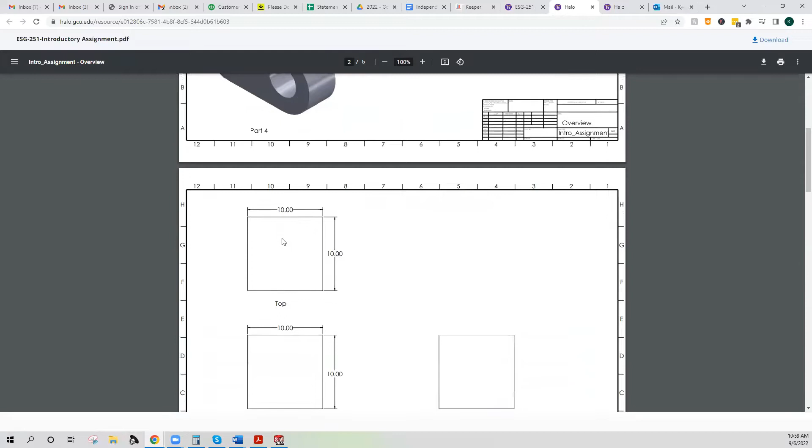So on the calendar, the very first assignment, what you're going to see is down here, a lot of the times there's going to be an attachment. So you always want to scroll down to the bottom and see if there is one. What we're going to do as one of the first homeworks from this is some basic sketches. All of this stuff is 2D that you then turn into a 3D component. So 2D components that you turn into 3D. We're going to talk about how to do that.

So you start by picking a plane that makes sense, and think of this as the plane that's actually bisecting whatever it is that you're working on. So if I were drawing something cylindrical like a coffee mug, right? It's one of my favorite example items to use. The symmetry of a coffee mug is along the length. And so I'm going to think about using either the front plane or the right plane, because those are planes that extend in Z the way that I want them to. A top plane can make sense for some different reasons, but it depends on what technique we're using. Since we're going to do extrude today, I'm going to start with a top plane.

So what we're going to do is create a circle. So there's all these different geometries that we can use, and each of them has a drop down for different variations. Each of these has a lot of different specific applications. We will use splines occasionally. We'll use circles, squares, and arcs frequently, like all the time. So what these are going to do is give us a lot of different mechanical options for how to represent an object. Sometimes that's with a circle. Sometimes that's with a center point rectangle. Sometimes that's with some other features, but I'm going to start with a simple circle here. So I want to make sure that circle is selected. And then I find a center point.

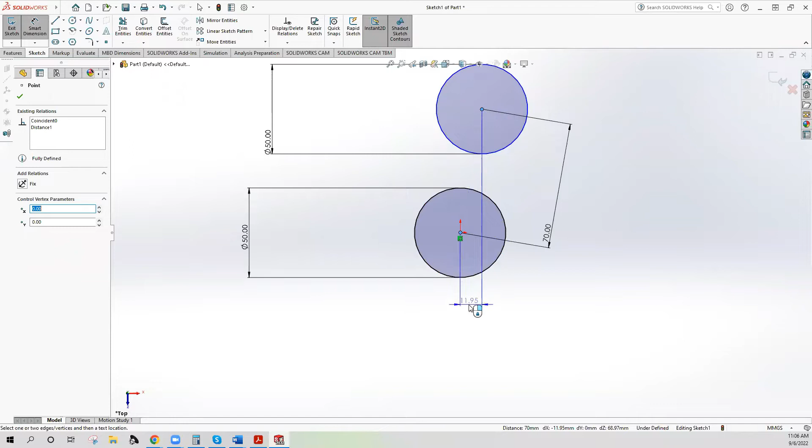You can see a few different ways that we can pull off a dimensioning line. So we're going to pull this straight down instead of at a horizontal or up at an angle, because it'll let you do a few different variations. So it's very important to understand those, and we'll get to some angular and arc dimensions and other things later.

What we do now is we can move objects around by setting them at the two different axes for distance. And now we have a fully defined sketch because it understands where the origin of this geometry is relative to the origin of the original geometry.

So what this will do is give us most of what we need.

No. Come here. You're going to be a guest star today. Come here. Up. You're going to be a guest star today.

All right. So here's what we're going to work with: we are going to work with these geometries, and we're going to do a feature. So it's a good practice for each of these features to exit the sketch, or what I'm going to call step out of the sketch. Then you're going to see the lines change color. And because these are fully defined, it's going to make life a little easier.

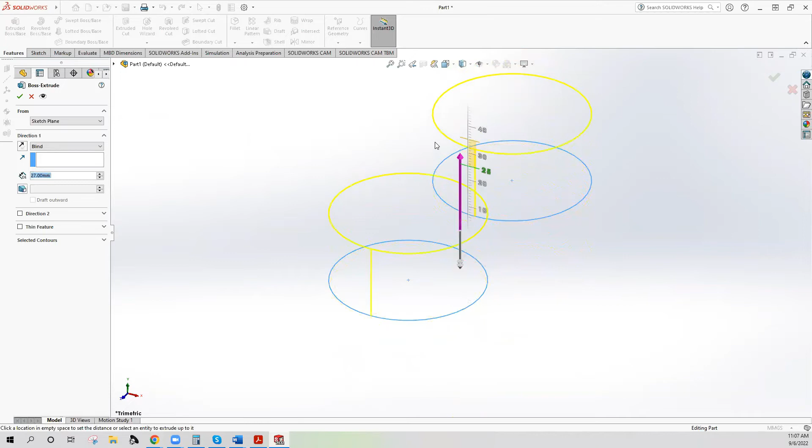So we're going to do what's called an extrude. That's one of the operations we're doing today for a bunch of different things that we're working on. You can set the geometry manually. You can drag it using this arrow when it highlights orange. You can change the direction and have it go down. So you can extrude up or down. We'll also learn how we can do extrude cuts, where we're doing cuts down through different things.

So think of SolidWorks as a way of drawing and representing how you would make material. So if I were making a simple pair of table glasses or something like that, I might increase this to 55 millimeters or something of that nature. So now I have a pair of cylinders from those original objects.

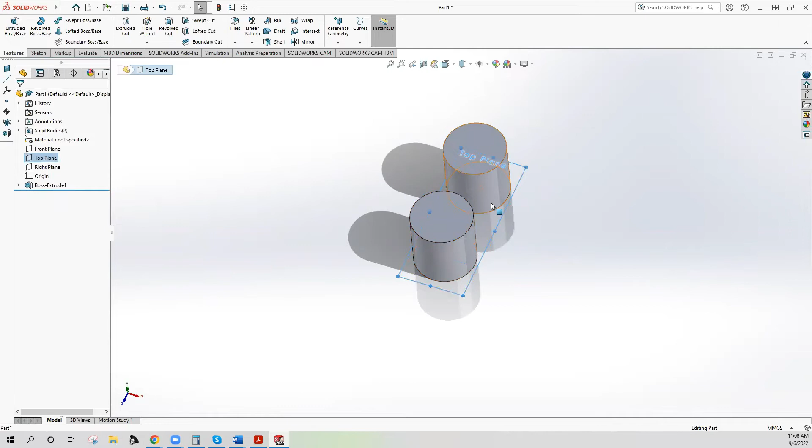So this is why I selected that top plane, because if you select any of these on the left side, this is our part tree. This is going to tell us what kind of operations we've been working on. We can see our top plane. This allows me to very easily make a couple cylinders in this orientation.

There's another couple ways that we can do that. There's a couple other features that we can do spherical shapes with, but this is kind of the basics for an extrude. I'll show another kind of quick example where we have a little bit more complex geometry.

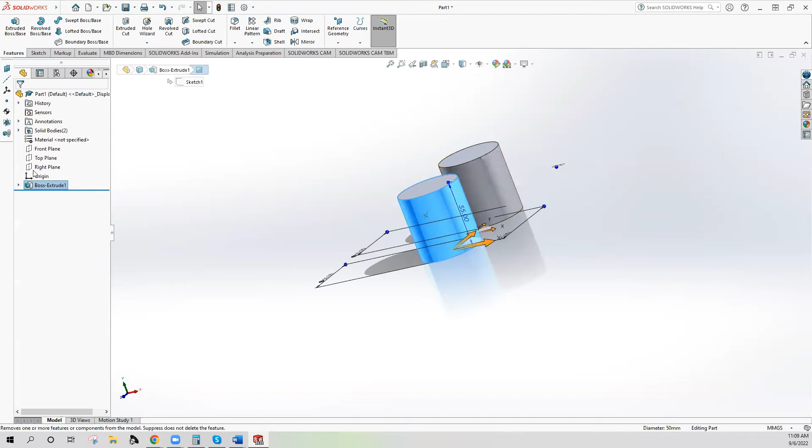So if I delete this because I don't need it, by right-clicking on whatever that feature is, we should have a delete feature. This might be one of the fun little hot fix issues that they're referring to. So normally you can execute a delete. Sometimes when you have the objects selected as a whole, it will prevent you. So it's interesting that we're having as many difficulties here as we are.

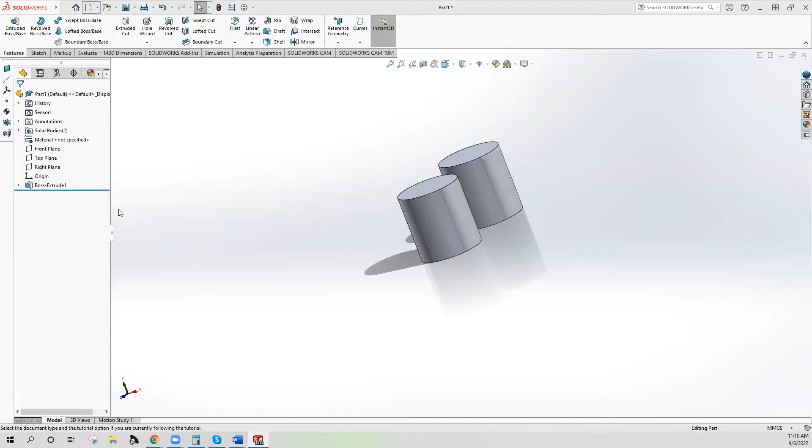So I'm going to do another rectangular shape. So this is a new sketch. This time I'll do it on the right plane just so that you can see how that's different. There's a few different types of geometries here. They have their place. Sometimes you want a center point rectangle. Much of the time you want a corner rectangle. Occasionally you need others, but not always.

If you guys haven't ordered a mouse, that's another thing that you're definitely going to need. That's not just a good idea for this class, but it's something that you're going to need.

While you're working with a trackpad, which is inferior technology for this particular class, you can come up here and you're going to make very frequent use of the view orientation button to get you to face whatever plane it was that you think you were working on. So in this case, this would be the right plane. This would be the front plane. So this is the face that we want to see, because this allows us to be looking directly at the face of what we're actually trying to work on.

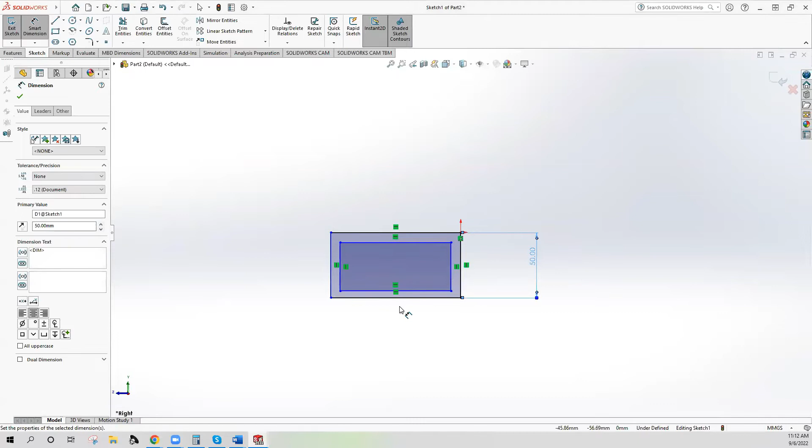So this one we'll say is 50 millimeters. This one we'll say is 75 millimeters. This one is going to be 50 millimeters. This one is going to be 35 millimeters.

Then I'm going to set a distance. There's a number of ways to do this that are pretty fancy, but what we're going to do is just teach you the simplest example first. So you move an object around, and then you can set some dimensions equal to each other. And there's some ways that we'll learn later on how to do those sorts of techniques.

But we're going to have for this about 20 millimeters as our distance. Let's do 15. That's a little bit closer. So the difference between this should be 12 and a half to get a nice even spacing. And so here, this should be about 7 and a half. So I'll let that be your homework as to why this is the way it is.

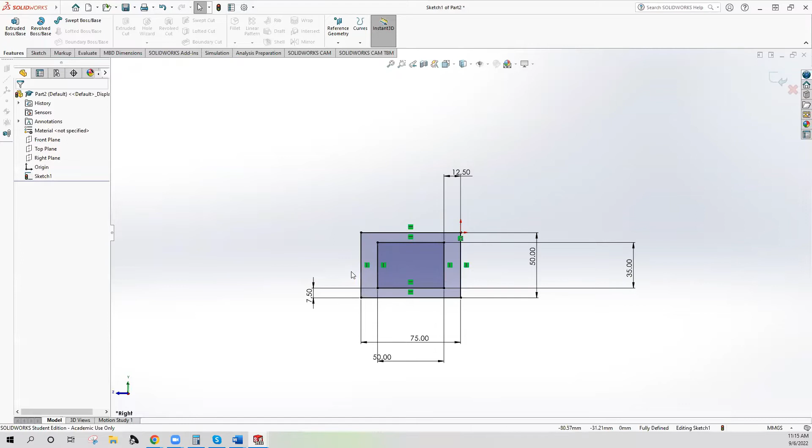The reason that it's important to set these up and make sure sketches get to be fully defined is when we go to make changes to them later, we want to make sure that all of the rest of the relations change, especially when we want to do multiple design variations in something called a design table. So that'll be a way that you guys can really get a lot out of the geometries that you're working with without having to redraw everything constantly from scratch.

So oftentimes it will default to the interior volume. You can select specific regions. So I'm going to tell you guys, pay attention often to these contours, because they're going to give you the ability to say, hey, I actually really do want this specific region, but I don't want this one. So some of the time it'll default to the entire sketch, and you'll have to clear out selections and specify, I only want this part of it, right?

So maybe we're going to make some kind of very simple rudimentary picture frame or something like that. And this I could do as 7.5 millimeters. And because I've got all of these set up, it's ready to extrude my feature. But one of the things I want to point out to you is sometimes, especially if you don't have a fully closed, fully defined sketch, this thin feature will pop up. So that's a warning sign that you may have done something incorrectly, or you may have some other difficulty going on. So you want to always deselect that thin feature.

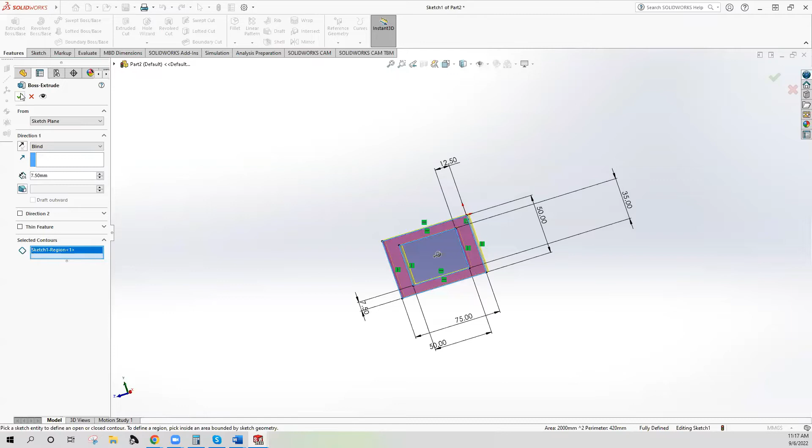So with this extruded, for those of you that have SolidWorks up and running, if you click and hold down the scroll wheel, you can change your view. That will be revolutionary once you actually get to work on more complicated parts to be able to see what's going on. Then you can always snap back to a specific view using the view tool. So a bunch of really, really important things that we're going to cover kind of all in a hurry for this first part.

All right, so in the chat, give me an idea how many of you are currently, let me get my command bar back here, how many of you currently have SolidWorks actually up and running and it's working for you? I'll get set up for one of our next drawing techniques. Okay, a couple of you are in the download process. Good. Okay, up and running smoothly is very good to see. That's always a challenge, trying to get SolidWorks to run smoothly. No matter how much RAM you have, it's always going to tell you that you don't have enough.

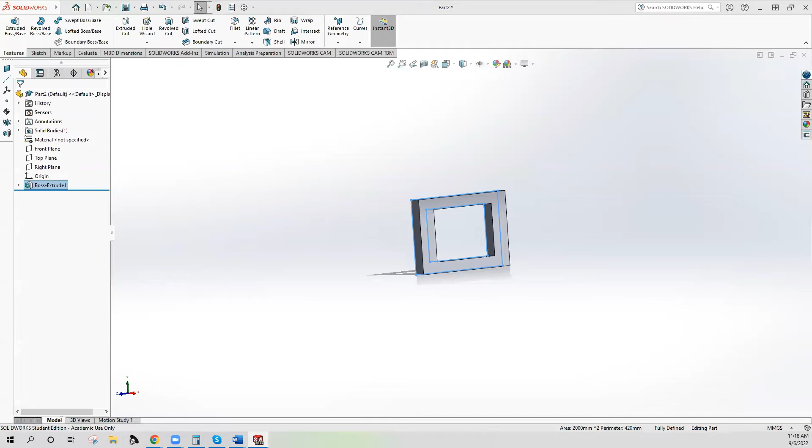Yeah, Zach, you'll want to make sure that you're getting 2022 ready, because they allow for the newer versions to open stuff from the older version, but then it'll convert it up to a new format, and that'll create all kinds of things. Yes, technical support. There will be some conversations with technical support.

The install process sometimes works smoothly for about 70% of students, and then the other 20+% suffer greatly. And then 2 or 3% made the poor life choice of running a Mac, often with an ARM processor. While cute, power efficient and all those other things, they can have issues trying to run SolidWorks because of emulation problems. So that could be what a couple of you end up facing—hopefully not too bad, hopefully we'll get them squared away. Okay, good, so that's actually a lot more of you having it installed than I expected. That's a good starting point.

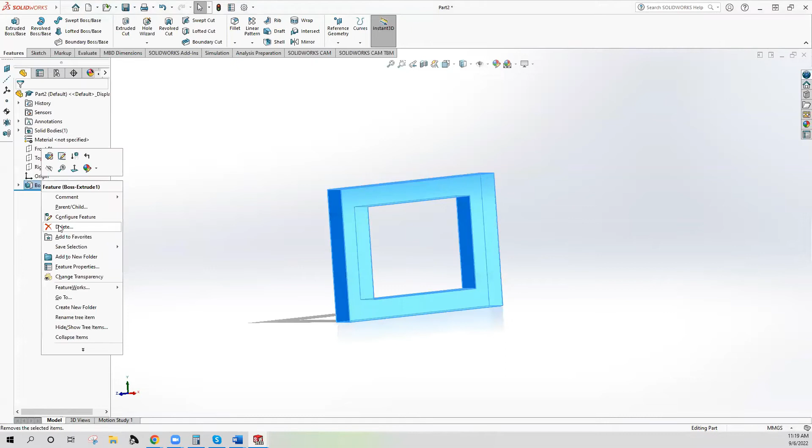All right, so we're going to go over another technique. I'm still not sure why I can't do a delete of a feature, but I can still do a rollback. Very interesting—so that's another technique you can use if you need to undo something and make a change. You can do what's called a rollback by moving that line up. Sometimes that's useful; there are a couple instances where that's something you're going to need to do.

Let's do one more thing. Let's take a look at how we would create something like a ball, because that will be very, very simple. We'll start off with a circle, since that's the base geometry for a ball. A lot of times you're going to end up with something like this where, okay, well I can't pick a plane now—well, now what do I do?

A lot of times when you're starting a sketch, this is another thing that's really critical when you have a lot of components. If you have a lot of other things already in the sketch window, even if they're rolled back like this, you have to expand the part tree up here and then make a reference. So here, I'm going to do it on the front plane just because that's fairly simple.

So I've got a circle already selected, but you'll notice my view. If the origin doesn't look like a right angle and looks something like this, you know that it doesn't have it—note that right angles don't go left. A lot of students kind of forget that, and so they draw stuff backwards and inverted, then go to put parts together and they don't fit because it's a mirror image. So remember, right angles go right. If you're dyslexic, that could be something you'll have to pay careful attention to.

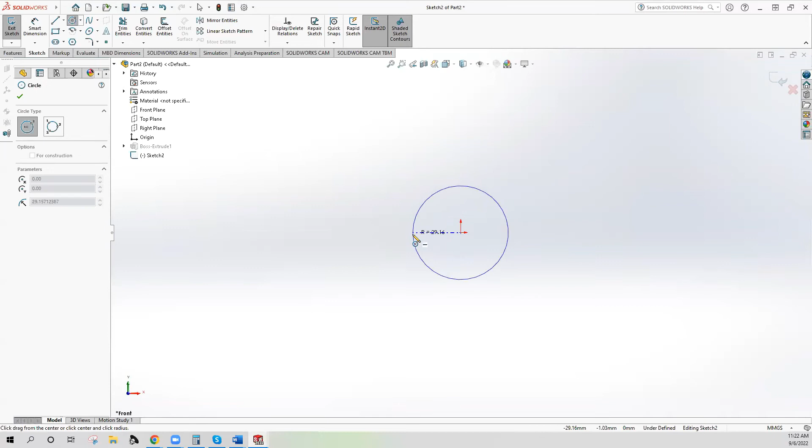But here, what we're going to do is go back to the view snap and make sure that we are square with our window of orientation. All right, so if we were to do, say, a 60mm ball—okay, so this, we have a cool technique under the features here called Revolve. They show an example of something like a donut, and also this little animation where you can make a disc out of a rectangle. So we can make a ball into a sphere, right?

But then you see here, we need some kind of an axis of revolution. Okay, well this gets us into another type of reference thing that we need in some drawings, so we can't do this yet. We're going to hit the red X and cancel, and go back into this sketch.

If we were out of the sketch and we had the light blue, what we could do is either click—if you click and hold over the name, you can rename it. You can always go to edit sketch here, or right click and edit sketch. That tends to be my habit for a range of reasons, so that I know I'm editing the specific sketch. The reason this becomes important is when you start adding lots of reference planes for some features and techniques we'll learn about later—you need to know exactly which plane and which sketch you're working on so that you don't get things mixed up. You'll see when we go to do things like the loft feature why that's so critically important.

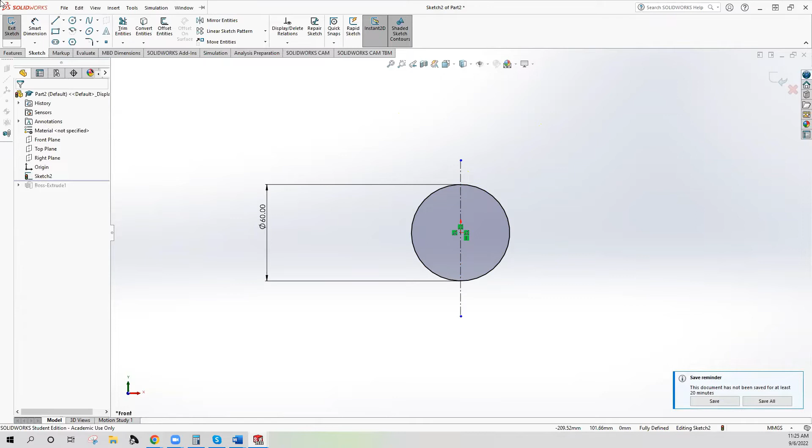Now we're going to do something cruel and use another tool, but we'll do that in a couple minutes after this quick demo. Once we're done, typically for whatever operation we're doing, we're going to hit the check mark, or hit the escape key depending on what it is we're trying to do. So I'm going to step out of this sketch by hitting exit up here, and then go back to this revolve because we now have something to revolve.

So again, notice, hey, I don't know what I'm doing. Sometimes you'll be able to click on the feature, but if you've got a lot of stuff going on in the same sketch window, I want you to get in the habit of expanding this part tree every time you see this box and finding what it is you're looking for. So here we want to manipulate sketch 2. It's going to make a couple assumptions, and line 1 is what we're going to be using. You can manually define this. In simple geometry like this, it's going to make a correct assumption.

And because it's a fully defined circle, we're going to be able to do a revolve, and this will work, even doing a blind revolve. If we only wanted it to do a certain length, we could do something like 275. All right, so this would give us just the narrow range.

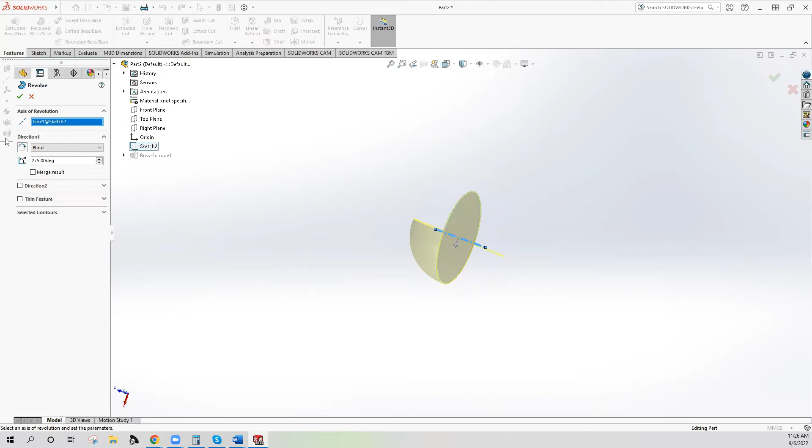You'll notice the way that it treats some of these. So let's take a look at, for instance, just let's do just 35 degrees. So 35 degrees, very different. So you can see where it starts from this plane.

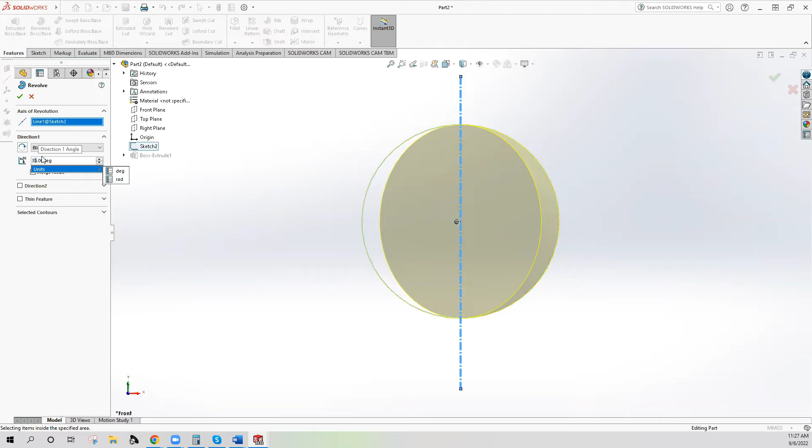So again, our origin relative to that reference plane, this is the back, and so this is the front plane. So if we're looking at the front plane, we see what our sketch looks like. This is that original circle that we started with. So as we go back up to 360 degrees, it's going to start from that, and it's going to rotate. If you're looking on from the top, it'll rotate clockwise. That is going to get confusing later on when we have more complicated geometries, but for now, we'll go ahead and leave it.

So even still, what we're going to see is, wait a minute, the sketch is open and self-intersecting, or it intersects the center line. So the reason we don't do a circle if we're going to do something like a revolve is because what this is going to try and do is create along this axis, because it's revolving the whole shape around itself, especially at 360 degrees. Even if we did 180, this would work, or it should. But because of the way this circle is going to be defined, as it tries to rotate around that shape, that axis is going to intersect itself multiple times, and it doesn't understand what to do with that geometry. So any ideas how to fix that?

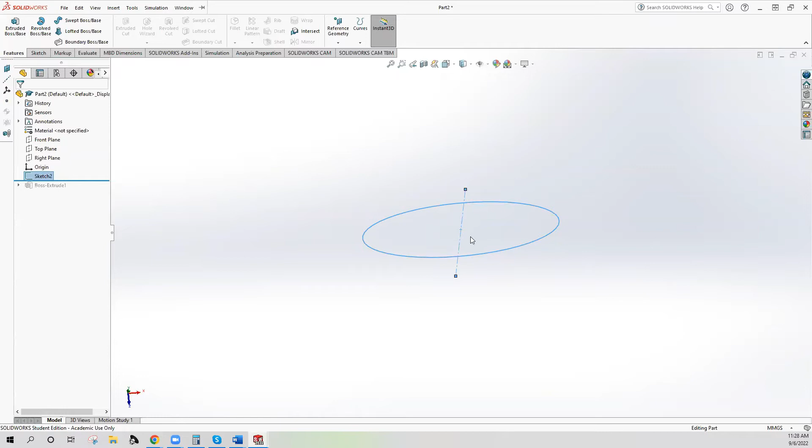I'm going to have to go back and edit this sketch. So we're gonna have to go back and edit the sketch. Okay, I don't see any suggestions.

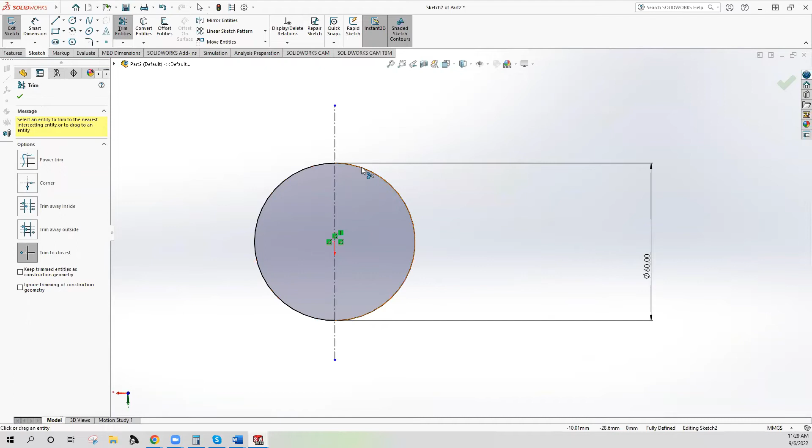So what we're gonna do is use a trim feature, and I'm gonna default to trim to closest. There are a lot of reasons why that's the best option, but trim to closest—I think it's going to default to power trim, but you're going to want to use trim to closest—because what I can do is take away half of that circle. But now it's no longer a shaded region, right? So since it's no longer a shaded region, I have to take one more step and enclose it with a line.

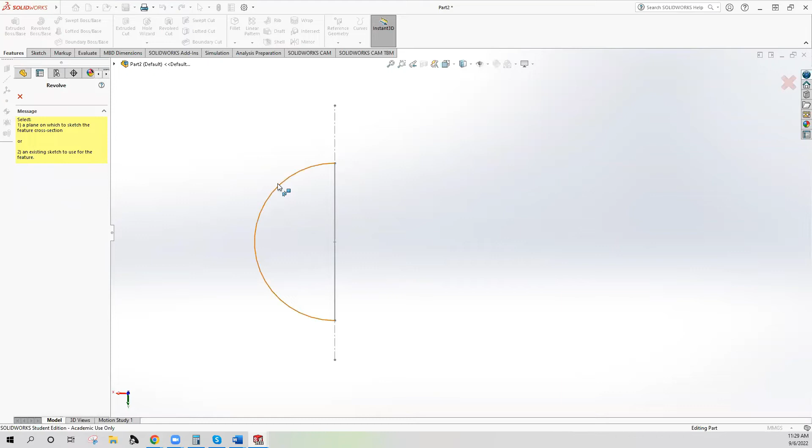So the arc and this line now form a fully defined semicircle. This is something that I can use with that technique to actually revolve. This is one that you guys are going to make a little bit more interesting use of soon.

So we want to revolve around this center line. We could do 360 degrees. This is a blind region, just to show you for good practice. This is how you would select the specific contour so that it was this enclosed region. And then we hit OK, and now we have our sphere.

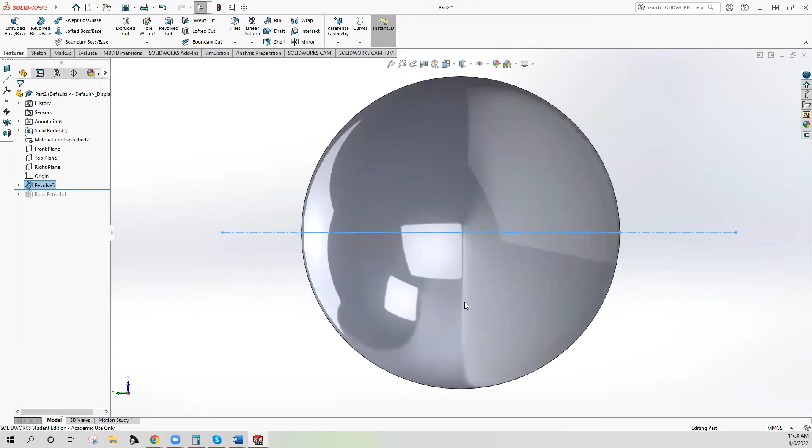But because of the way that this is created, we can see that our view is completely upside down based on what it should be. So if we look on from the side, we look on from the front. This is actually the back plane, and this is actually the front plane. So if we look on from the front, now we can see our correct view orientation.

Again, I wanted to show you guys an example of where the view and the orientation matter when we're doing more complicated parts. You guys thought we were working on the left side there, but we were actually working on the right side, because we were looking at it from the opposite side. So it's one of the only ways I can think to demo how you are going to start changing your thinking from 2D to 3D in how all of this works.

So that covers a few of the basic processes. Those of you that have SolidWorks up and operational, I'm going to set up a couple breakout rooms for you guys to start trying to practice a couple of these things. I'm going to jump around to the different rooms and see what some of the questions are as you guys are trying to start this process.

So it looks like probably a good percentage of you, at least half or more, are in pretty good shape. A few of you are still downloading, I'm sure, because GCU's internet is renowned to be some of the fastest in the land. That's the good news.

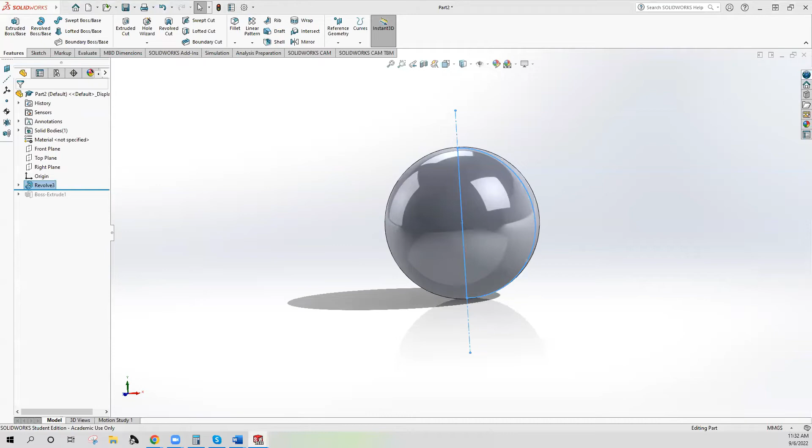And actually, that feature may not be enabled for this. Yeah, I think they've moved that feature out actually. You might have to stop recording because it might not allow you to do it while you're recording. Yeah, normally I think they've moved some of those features in the software now.

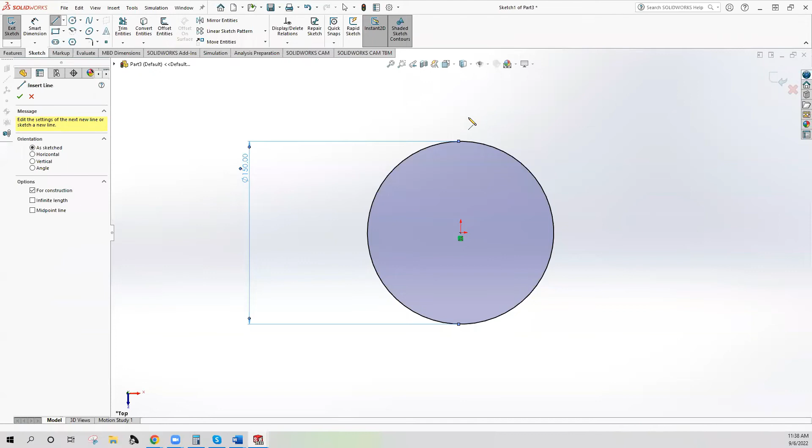Because I'm going to reuse this sketch using some of the same techniques that I used elsewhere, I'm going to add a center line. I'm going to do that all the way through the center here. This is going to give me a reference point that I'm going to need. I'm also going to add this line down the center, a solid line, because this is going to give me all of the features that I need to do everything that I need to do for the next 2 steps.

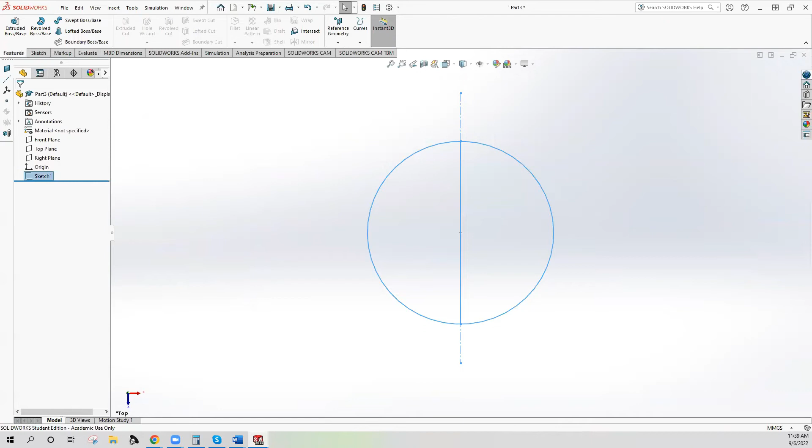One of the things that I find helpful because of how often I use them is we're going to learn really quick about a reference geometry. I'm going to go ahead and extrude from this sketch. I'm going to tell it I actually want both this region and this region. Because of those dimensions, I want it to be something like, let's do something like 900. It's probably a little aggressive. Let's do 500. So let's do something like this.

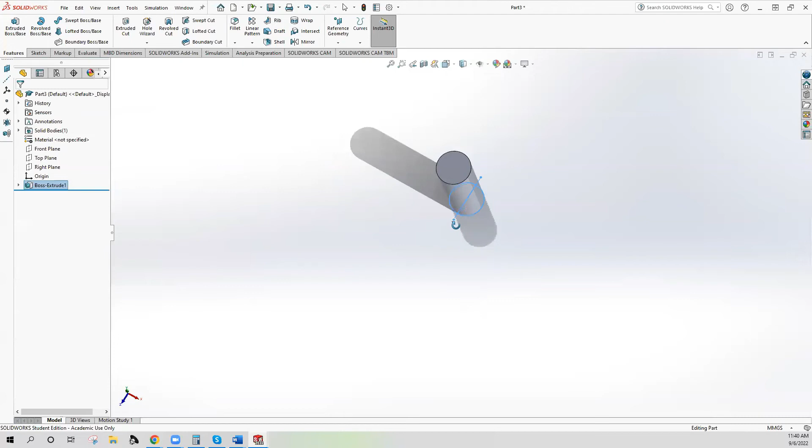So now we have the first part. The question is, how do we now do something here? There's a couple different ways. You could start by adding a new sketch. And so I'll show you what that would look like, and then I'll kind of go back a couple steps and show you what I would do.

You can click that face, or you can click that edge or some other reference point once you've done an extrude. But the problem with this is, and I'll show you kind of what that problem is, if I then create, even starting with a center line, one of the things that's easy to get into the habit of doing is sketching on an off angle like this. It's going to throw you off, and it's a bad habit to get into. So you want to reset your view.

Just trust me, I'm a doctor.

So I'm going to use an arc. I'm going to use a 3-point arc specifically, or a center point arc. It's different from a 3-point. I use 3-point and center point often. So this gives me just this arc that I'm interested in. I'm trying to show as many different variations of technique as possible so that you guys can kind of adapt

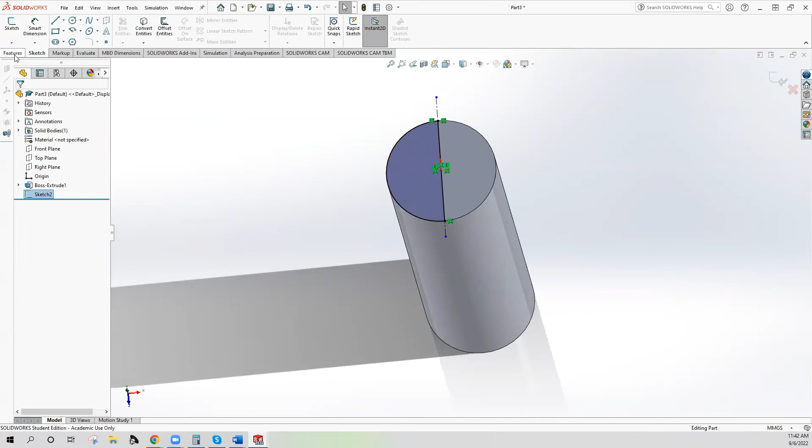and adopt different techniques. So because this is referencing an extrusion from a fully defined sketch, this arc itself is already fully defined. So if I step out of the line properties there, I have a fully defined semicircle at the top, right? And this works great. I can then step out. I can do my revolve feature, and I only need 180 degrees here. And then we're done, right?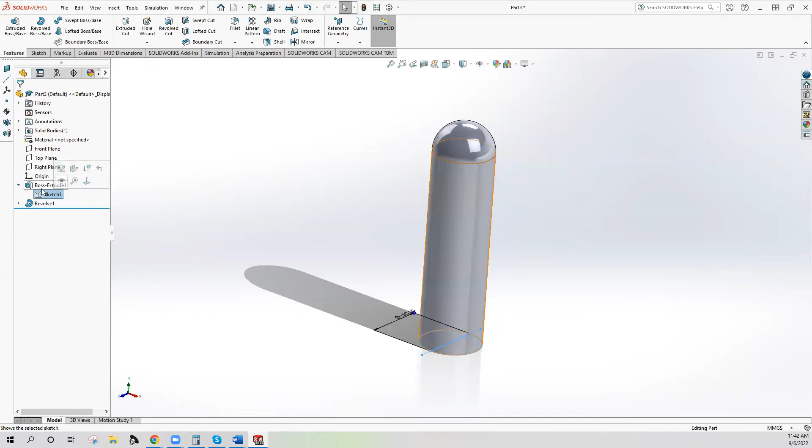But then I go back and read the assignment prompt, and actually this isn't supposed to be this tall. That looks nothing like what the actual prompt does. That's way too tall. So I had to fix it. And now this is where the problem can originate, depending on how complicated and detailed your sketch is. So instead of editing the sketch itself, because the sketch is fine, I have to right click and then edit the feature. So it's another thing you're going to do very often.

So actually this needed to be 450 millimeters. So this time, because I'm referencing the top of that geometry, it was able to follow. Depending on what it is that you're doing, you can create a problem. So I'll show you an example of what that looks like using this next technique.

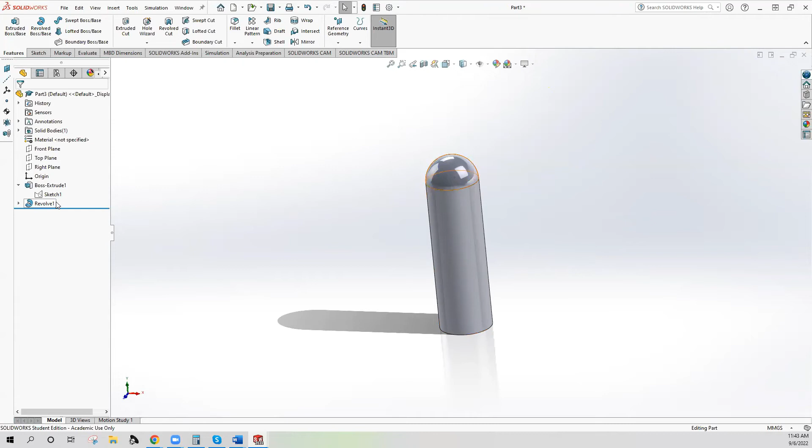So I'm actually going to delete the Revolve, assuming it'll actually let me delete a feature. No, it will not. Interesting. Yeah, that is a bug with a capital B. So I'm hoping that's fixed in the patch, because I need to go back and reinstall that. Yeah, you normally can do that. So I'm going to do this a different way now.

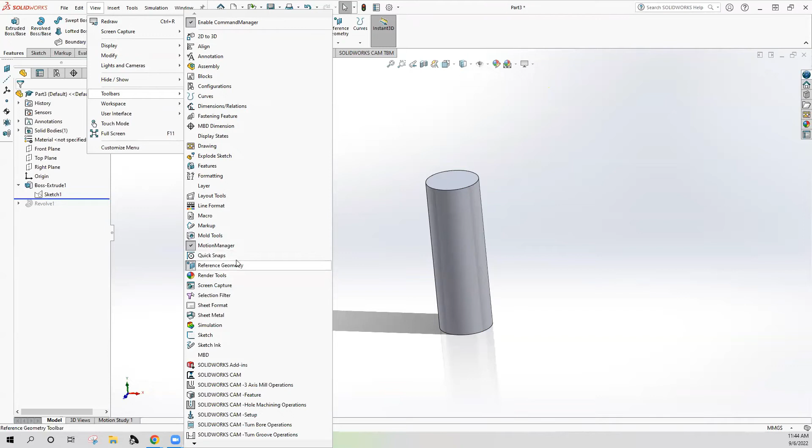So one of the toolbars that I make visible all the time is going to be under View and Toolbars. This is also where you can come back and find the command manager. If for some reason this top ribbon that's called the command manager goes away, this is where you can find that again, because a couple of you will almost certainly have that happen, and it will send you into a full-blown panic. Reference geometry is one that I recommend having. I stick mine off to the left side just because that tends to work really well with the way that I think about the program.

The way to do that manually is to insert a reference geometry and then plane. I don't want to go through those 8 steps every single time, especially for complex geometries. So in this case, it's very simple. I'm going to reference that face, and this is what's going to create the different dimensioning that I'm talking about, and it'll create an error. So I'm trying to intentionally create an error so you guys know what it looks like, so that when it comes up, it will be obvious what you need to be doing.

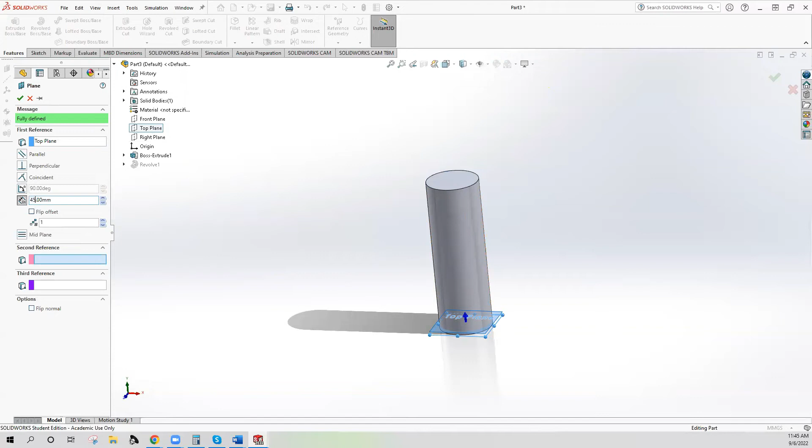So if this was, let's say we'll set this back up at the 500 millimeter distance right here. This is what's called a reference plane, and we're going to get to use these very, very often. So this is going to be something that's going to benefit you really starting in the next couple of weeks as we start getting further into 3D sketches. But there's a lot of utility for these that we'll get into. So I'm going to start by fixing this. I'm going to set this back to the 500 that we had.

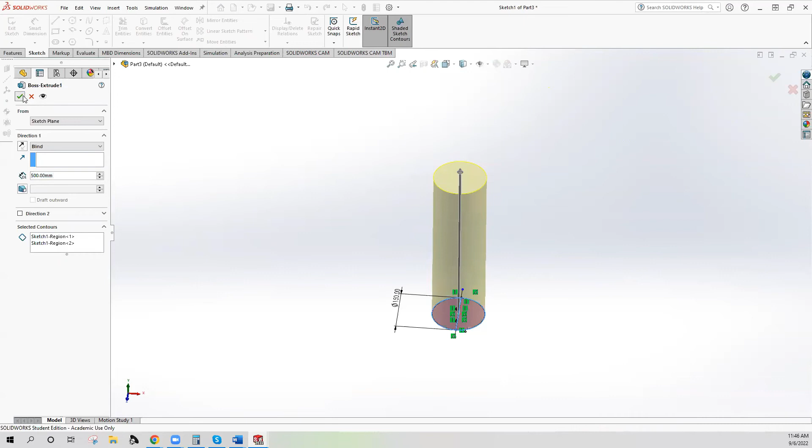And now on that plane, I'm going to add a sketch. So when you select a specific plane, this is what I was talking about, you really want to pay attention to which one you're selecting. Because if you just do a sketch, it may or may not default to being on that plane. But this will allow me to separate the features of this sketch from this cylinder. There are circumstances where you do want to be able to do that.

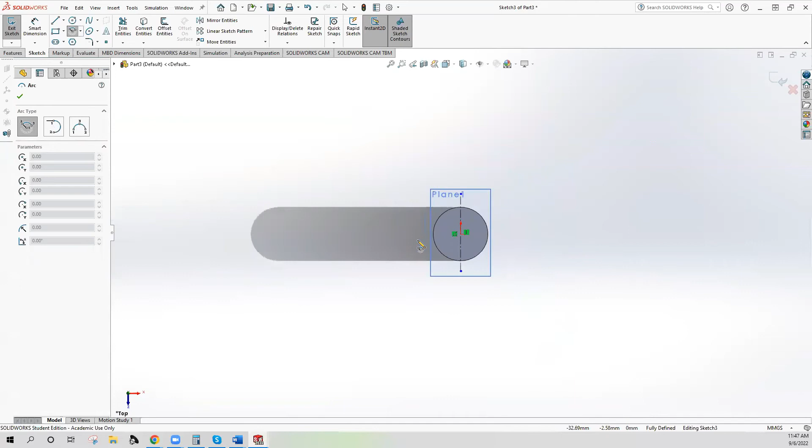It's not always exactly the same reasoning, but I'm going to go ahead and use my center line again, deselect the tool with escape, and then I'm going to come back here to a center point arc, because that just makes the most sense. Again, realign things, because the center point of that line is not the same as the center point of the origin. And if you're trying to do things quickly, you're just going to whip it like this.

So a number of you are going to do this on sketches. So I'm going to go ahead and leave the error so that you know what it looks like and where it comes from. So if you're trying to be quick and lazy and you go, all right, I'm going to connect this. Almost every semester, at least one student turns in something very much like this.

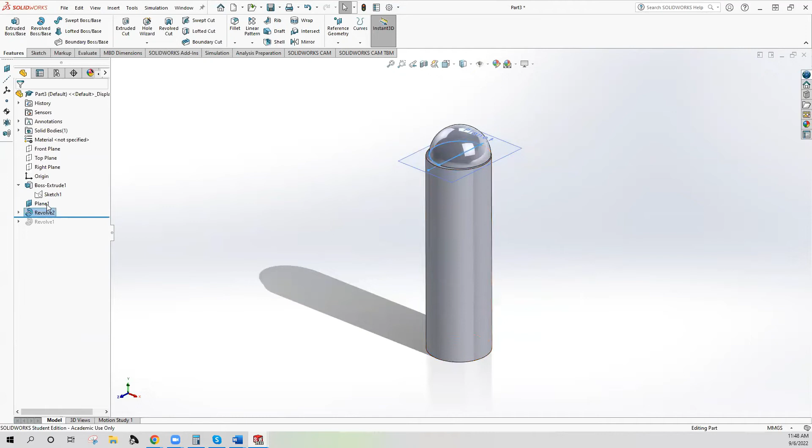So, all right, now I'm going to go back over to features and I'm going to revolve because I just want to get done with my homework for the week. 360. All right. There we go. So now I've got not quite close, but not quite. Now I go back, do the same thing, figure out, oh, wait, this actually isn't the right aspect ratio. This actually needs to be 450.

Now we have a problem, right? So is there a way we can fix this? Or do we just have to start over? What do you guys think? Let me see a vote in the chat. How many think we can fix this? Good. Positive attitude is good.

Yep, totally fixable. The reason I like reference planes is because I can come back and any of these features that I'm working on, I can come back and edit and say, actually, I really needed this instead of the top plane. I really needed this to either reference this face with a 0 offset or reference this top plane and then have the new dimension entered as 450.

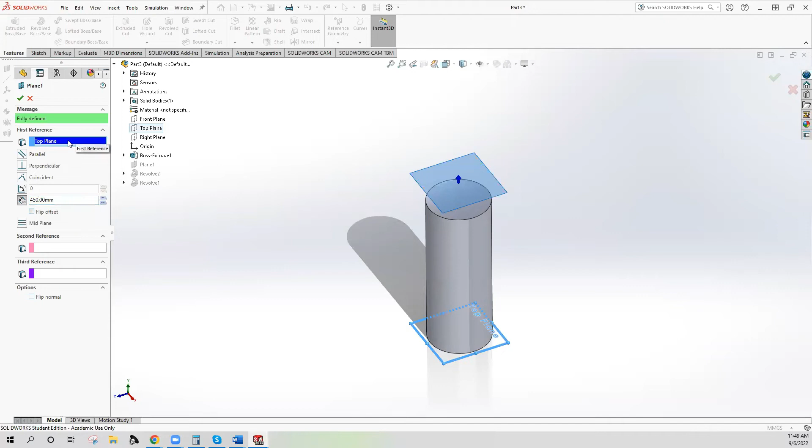Much of the time, if instead you associate it with the face instead and do a 0 offset, that will get you what you want and the geometries will move together most of the time, including the reference planes. So those tend to be pretty important. So this gives you a few ideas on how to fix some of this.

The other thing is we want to know, how about this top part since we messed that up? What do you guys think? Can we fix that or do we need to start over with a new arc? Let me know in the chat. Is it easier to start over or do you think we can fix it? Okay. So we've got a few mixed votes. A lot of folks very sure that we have to restart because it's ruined.

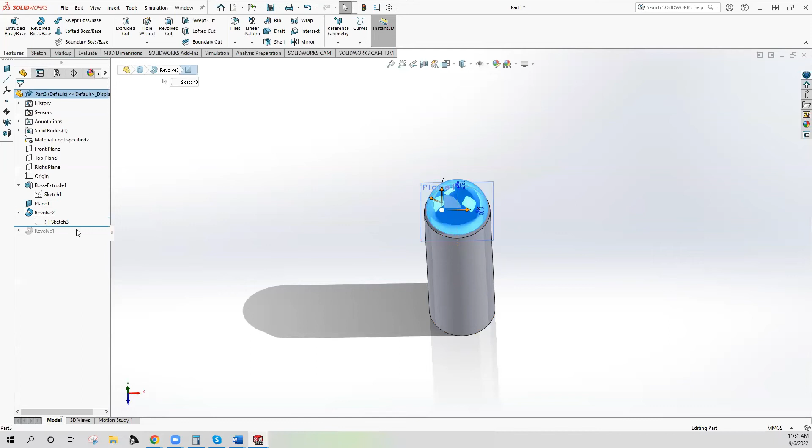Can't go back. Okay. So what we can do is we can expand whatever that feature is and look at the base sketch that created it. There's a reason it's good to have some different sketches for different types of features that you're executing. We can go back and edit that base sketch. So here, instead, what we can do is we can actually cheat and use Smart Dimension to fix it.

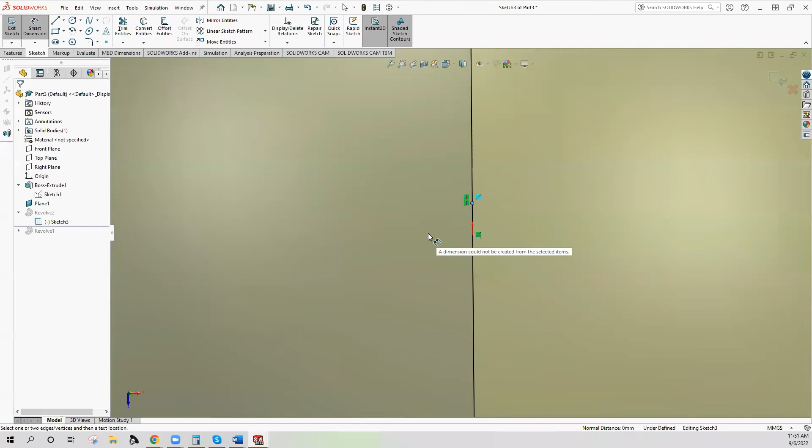So what I'm going to do is I'm going to grab that center point and say the distance between that and the origin, midpoint 1 and the origin. It's not wanting to let me grab this. So let me see if I can highlight it a little differently here. You can also do it here.

If I select, so if I selected the center line, set up the Smart Dimension, you can sometimes force its hand by manually expanding the part tree. If there's geometry in the way and it's not allowing you to make a selection, here again, the reason it's confused, this is actually a really good example.

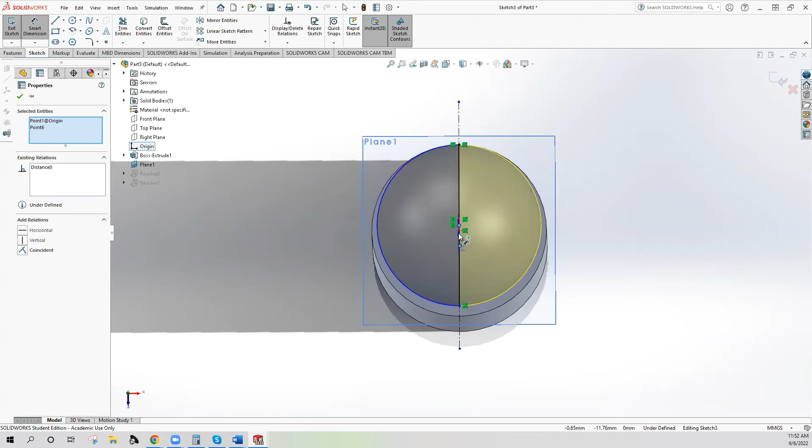Because I didn't do a reset, the actual origin is here, even though it looks like my origin should be here. So this is another example where the view orientation is important. So now I can actually pick the origin. But if I'm struggling, I can always expand the part tree and manually reference the origin as my second dimension.

And this I want to set as 0. So that will relocate my geometry to the center. And here it actually fixed the geometry to do the one thing that I needed it to. When you get to more complicated geometries with more intersections, more tie lines, more intersecting geometries, that won't always work as cleanly, but it's a starting point to correct where that feature is located.

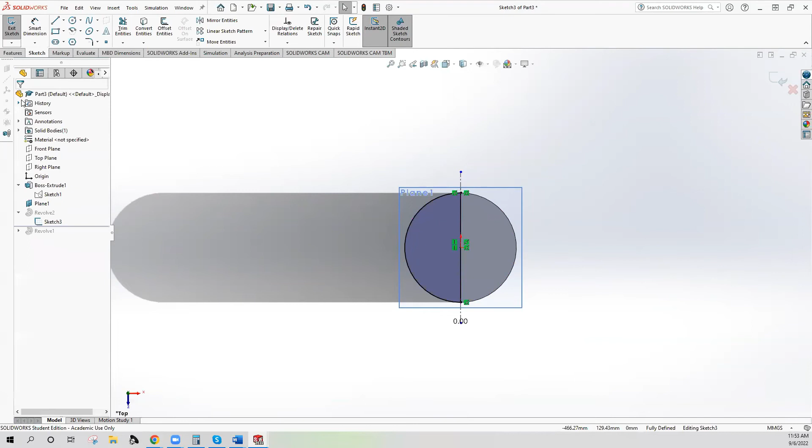So now, if I rotate this and step out of the sketch, you can watch it rebuild correctly. So there we were able to fix the geometry without having to do really extensive surgery. And one smart dimension is a whole lot faster than going back and starting over, right? So these are all kinds of the dozens of little nuggets that I'm trying to plant early in the semester so that you guys can start working to be time efficient in your sketches.

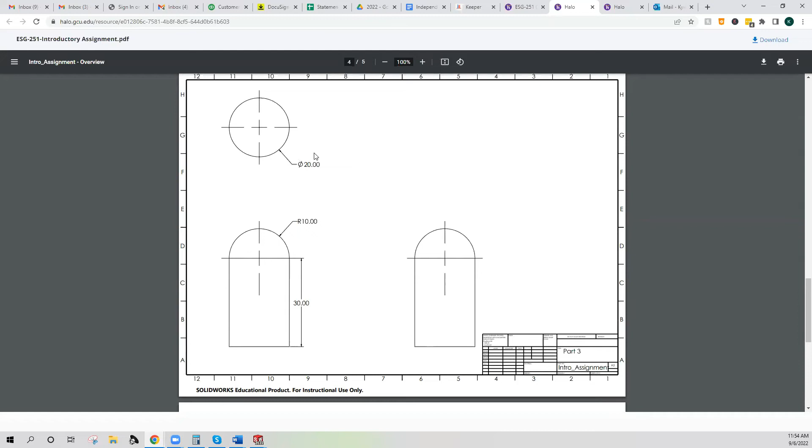Because that's one of the main things that I want out of the semester for you guys, is making sure that you're efficient, that you're fast, that you understand when I throw at you any kind of a drawing that has dimensions on it, especially when they're far more complicated than these, that you know how to deal with each and every one of them. Because there's a couple different things that we need to know, even early in the semester, like R standing for radius, the circle with the slash through it standing for the diameter or the distance across the circle.

There's different heights. There's reference measurements if it's a broken line and all of those sorts of things. So we'll get into more detail about these as the semester goes along. So this gives us at least a good range to start with for some of these early techniques. And a lot of the times, as far as the format of the class, we're going to start off by covering some of these techniques. We've already covered a number of the really early ones.

But we're going to cover the use of a technique. We're going to apply it to a couple different parts and geometries. Then we're going to turn around and have you guys practice and drill. Because you're only going to learn so much by going back and watching the technique that I'm doing. The mastery of this class comes from you guys actually doing the practice, doing the repetition. So that's one of the main things that we want to spend a lot of time doing this semester.

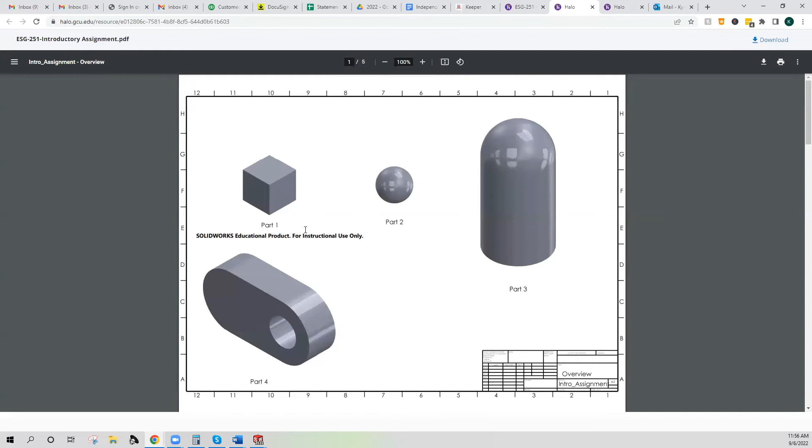All right. So that covers, I think, the major techniques for this first part. There's a couple other things that you guys are going to need to access. So let's go ahead and go over that as well. Let's get an update on your downloads. Are a couple of you still stuck on that process? I'm hoping a few more of you are able to follow along now. That's why I wanted you to start downloading the instant you got access to the welcome announcement, to give you the best chance of getting the most done. So I'll keep an eye out for that while I set this up.

So there's a couple different things that we'll use later in the semester, but one of the ones that I want you guys to be in the habit of is there are a number of files and models and things like that. But there's also a series of tutorials, and there's a few different things over here that you can access. There's a couple resources. There's like a SolidWorks manual, some other components. There's appearance stuff that we'll learn about a little bit later. But this is really kind of the hard way to get to things.

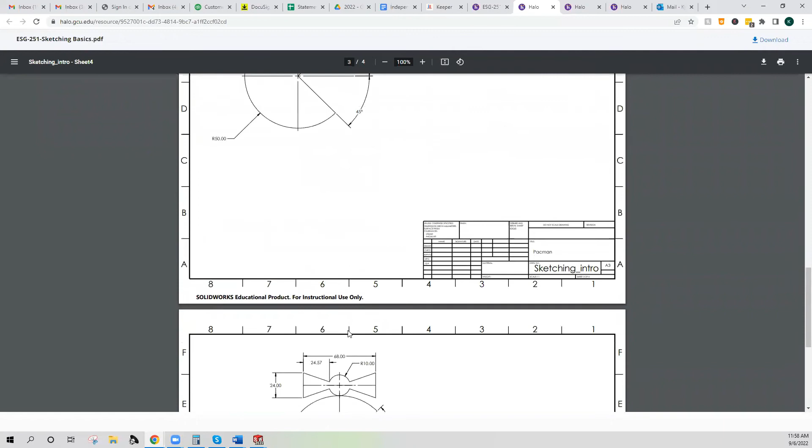So instead, we're going to go back to the home tab, because a couple of you are going to start looking for some of these assignments. In particular, you're going to start looking for anything that has a tutorial on it. So even like this sketching basics assignment, you have a few dimensions that you're going to be working with. So we're getting a little bit more complicated, some more references and things. So we're going to advance the technique next week of how to really do a lot with the smart dimensions.

But all of these tutorials are going to really help as you guys get this installed, to get you functional in the software. So I'll show you where to find them because these don't have a document attached. And we'll talk also about some of the mechanics of how to submit an assignment. That'll be fairly straightforward, but it's something that we want to keep in mind. So let's do this. So we go back to the home tab, and then up here on their list of options, there's Learn.

So the step-by-step tutorials, this is what we're looking for. And it's going to open up this other window. So this is what we're going to see. And all of those tutorials, many of them are going to be under the basic techniques. So this is the introduction to SolidWorks one. So this is one of the first ones.

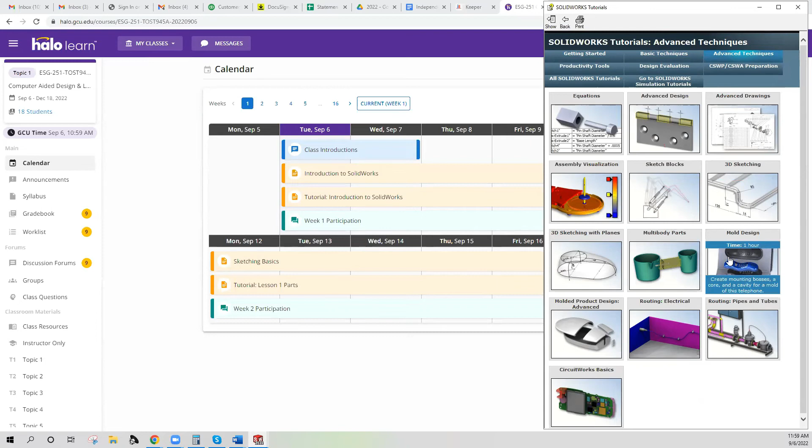You're also going to do parts, which is here. So this is kind of the fundamentals, but most of them are going to show up here under basic techniques, or at least most of the rest of them. We'll do some, I think, of the advanced techniques. We're not necessarily getting into mold design and some of those other things at this point.

I don't think we do a lot with the productivity, but there are some things that we do with simulation. I think a lot of that's now moved into individual classes. So I think there may still be one that we're doing there. And then there's some CSWA prep type processes. So giving you a more complicated geometry with more features, and it'll walk you through how to do each of these. So a bunch of these are actually baked into the assignments.

So I'll go ahead and terrify all of you guys with this one, the French curve. So this is what we're trying to build you up to, because if I can get you to survive the shock of opening a drawing like this and actually understanding what this means, which you guys will, then anything that they put in front of you in order to create for the CSWA exam, these are the kinds of things that are going to prep you the best to be able to take that exam

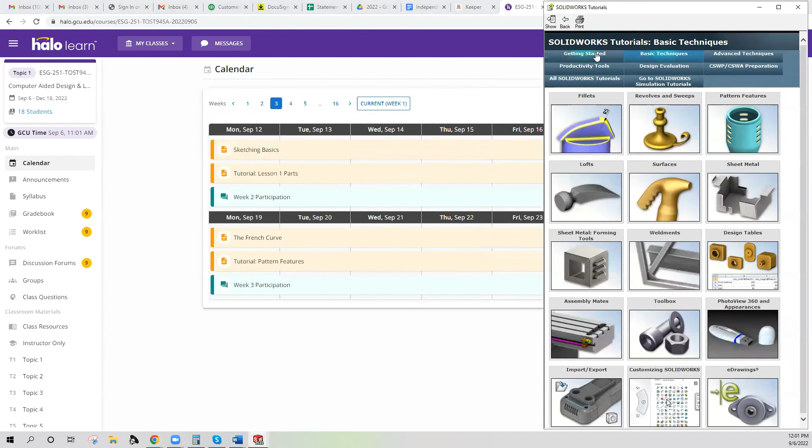with confidence. So this is why we're paying attention to all these little nitpicky details that seem like they're not very fun. It's so that we can start to get to do really fancy things later on down the road. But all of these, the pattern features, the parts, all of that is here. Mostly under either the basic techniques or the CSWA prep. So I think half or 3/4 of them are CSWA prep.

So we'll take a look at the intro and what this does. Let me make sure that it's actually going to show the geometry. So this may be a couple of the other things. So we don't actually need any of our other geometry there. You use navigation buttons going forward and backward. They don't really have them clearly labeled. But what you can do is when you click these, it will actually show you in the software again.

For whatever particular reason, we're having some challenges. I'll get that patch installed because it's doing a bunch of very unusual things. But what this will do is it'll highlight and show you where in the actual software these things are. So a couple features that you've already seen, and it'll walk you through how to use smart dimensions, how to create a couple of these processes.

Some of the time, there'll be a couple questions that'll come up, especially here where you're trying to do a distance between them, an offset distance. So that's one of the features that I was working with. You can use the offset entities, and it'll show you where that is. So it'll kind of introduce you to a lot of the features that allow you to get some interesting parts

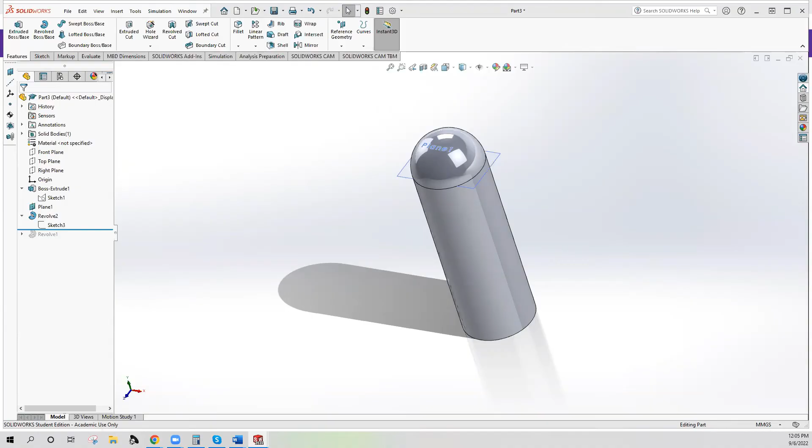So we just talked a little bit about the extrude cut being very similar to the extrude, similar kind of features. And sometimes you need a blind cut for a certain depth. Sometimes you need a through all cut. If you have multiple different geometries involved, you might need a through all both, which means through all both directions, essentially infinitely. But a lot of times you'll be okay with blind or through all.

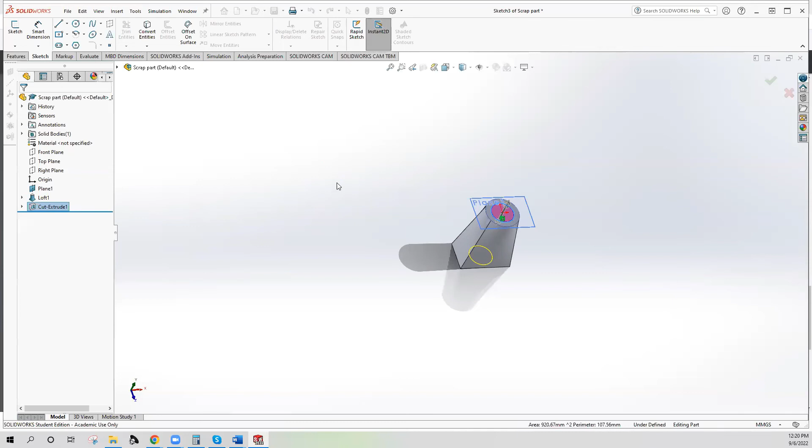You can draft inward, or you can draft outward, depending on what type of operation you're trying to do. You can do a second direction cut. Most of the time I don't recommend that, but you want to make sure that you are very carefully selecting which specific contours you want to be doing the extrude cut with. Another example of using that through cut for something like this that maybe has an unusual shape.

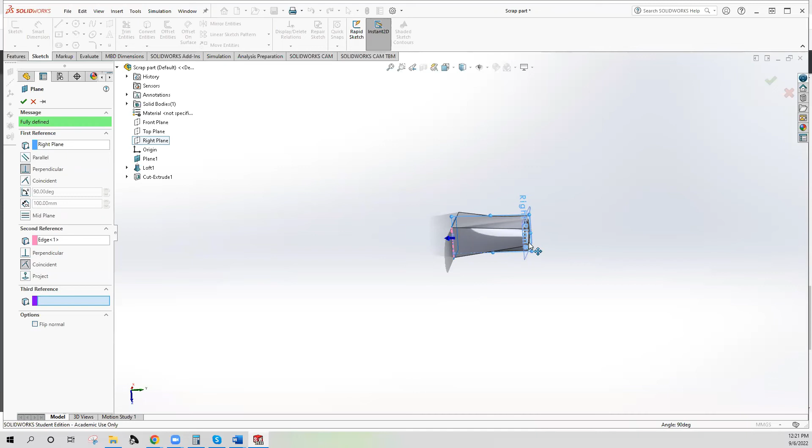There's a couple more steps that you need for reference geometry. So this is a useful thing to see for a reference plane. What you'll need is, again, to expand the part tree and start with something like a bisecting plane, which in this case is the right plane. And then you can use as a second reference something like an edge this way, and instead of perpendicular, sometimes you want it to be coincident.

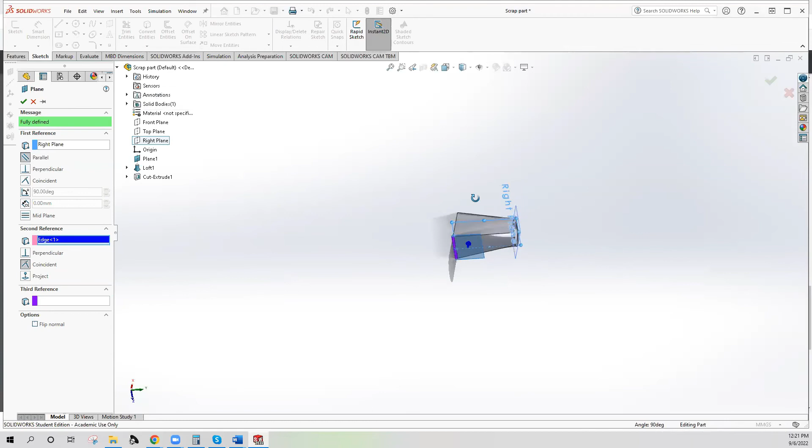But you can also, depending on what you're looking for, have it be a specified distance away. So if you pre-select what you want it to be, in this case, a distance of, if we set that to 0, that would set it to a distance of 0. So that would be a reference plane on the right plane. Now, with that 0 offset, if we were to select this edge, the distance doesn't work for us anymore. So we have to reset this to being parallel to that plane. Now that frees up our geometry to be able to be attached to the edge of whatever this feature is.

And we're going to be able to do some more complicated stuff more quickly here. Now we can change our view orientation to make sure that we're looking squarely at the part. We'll do another quick example of a cut extrude. I'll do a polygon so that you guys can see what that looks like as well. Before I do that, I'm going to add a center line, and it's going to look for what plane we're doing this sketch on. So I'm going to expand the part tree and tell it I need to be sketching on plane 2 so that it doesn't get confused on what's going on.

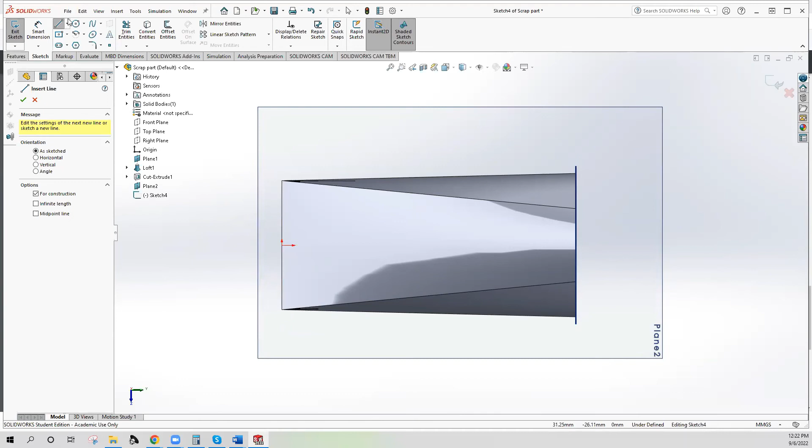So that center line is still selected. I'm going to use this as a reference because our polygons have a center point. So I'm going to do one here. And I'm going to come back in with the trim. And I don't need most of the rest of this. I'm going to do a fairly simple type of pattern.

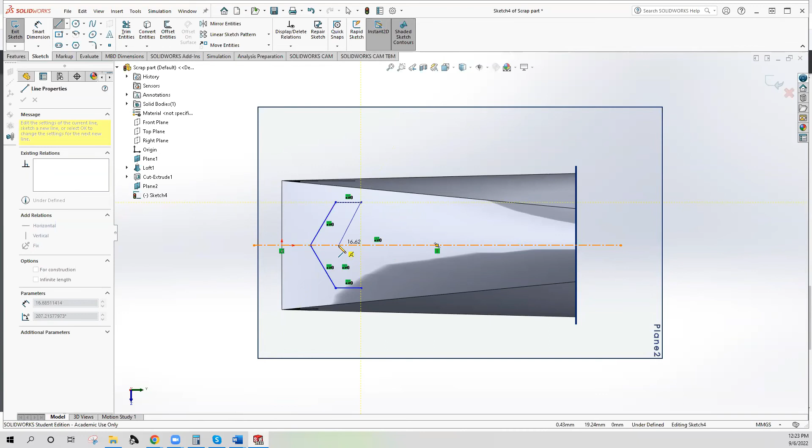So I'm going to come back in with lines. Here I can use that yellow highlight change to see the additional yellow dotted line, which means this line is parallel to this line. I'm going to do the same thing here, and I'll see this is parallel too. Then the circle inside the circle means those points are concentric.

Some of the same things you'll see in the tutorial are this linear sketch pattern. So what we can do is select this and do it along the X, Y, or Z axis. The X axis isn't particularly helpful for us here, so we're going to say 0 in the X axis. What we're interested in is this one, looking at our values here. That's the Y axis.

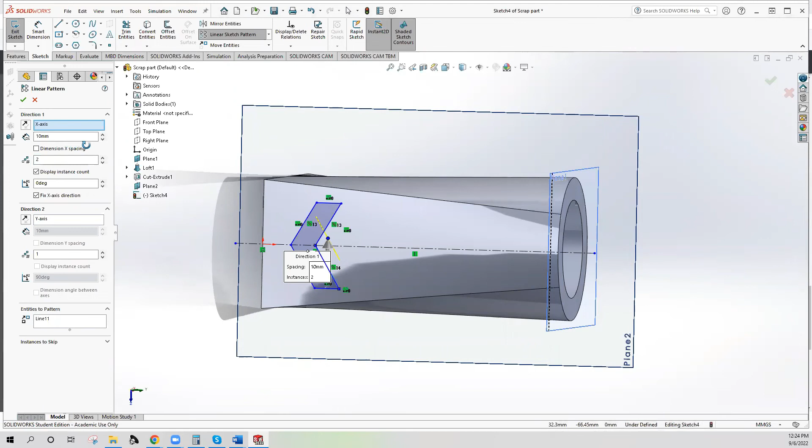So I'm going to go back into the linear sketch pattern. This one, we only need 1. The Y, we actually want to do 3, and 10 millimeters is fine. Then we want to select the entities to pattern. What we're going to do is select this whole region, and we're going to separate this.

Okay, looks like Tyler's going to be back.

So we're going to separate this by a distance of, let's see what 100 millimeters looks like. That's way too far, so let's do 20 millimeters, something like that.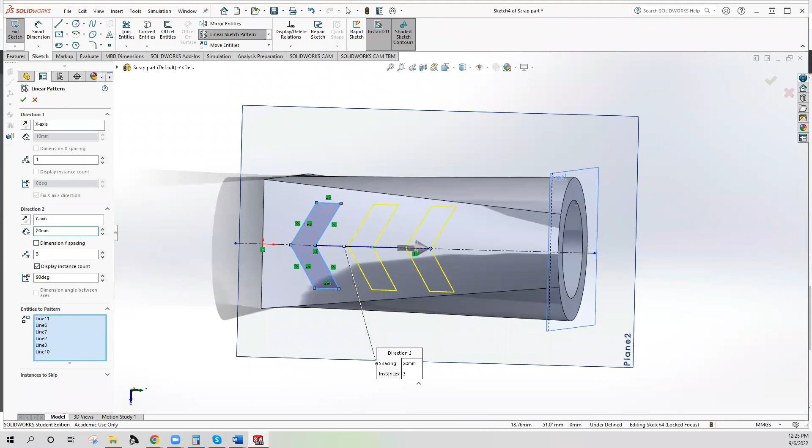All right, so here we have our randomly chosen shape. Now we can do an extrude cut using these, and this will be a good example to show you how to do another instance of a through all.

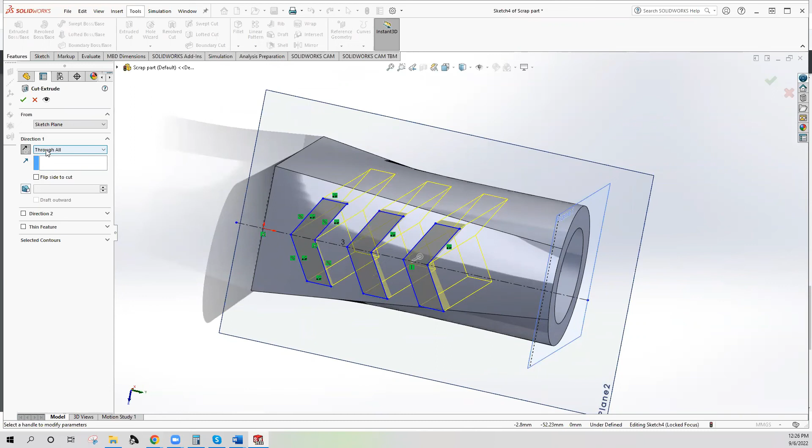I'm going to go to features while I have that sketch still selected, since that's the one I want to do this operation with. So for this feature, right now it's going to try to do a cut in this direction. What I'm going to do is either hit flip the side to cut, or change the direction manually, which makes the most sense. By doing select through all from this sketch plane, I can now see all the way through the part I've got going on, and we can see what we have as far as geometry.

So it allows us to have a lot of really interesting kinds of features and characteristics in the stuff we're doing. We'll learn later in the tutorials about how to do lofting and some fancy shapes like this, but you guys will at least be able to play around with some of these techniques and start getting very far into how to create these drawings very quickly.

So I'm kind of going over 2 to 3 weeks of techniques at a 30,000 foot overview. That's why it's going to feel really, really fast and aggressive.

But that's a good way to begin in order to make sure you guys have a very high pass rate at the CSWA, because that's going to be my goal. I want to make sure there's no question as to whether or not this particular class format can work, in order to get you guys to the goal, which is that CSWA exam.

Okay, so we've been able to use that particular feature. I'm going to pause here and then check in to see where further questions are coming up.

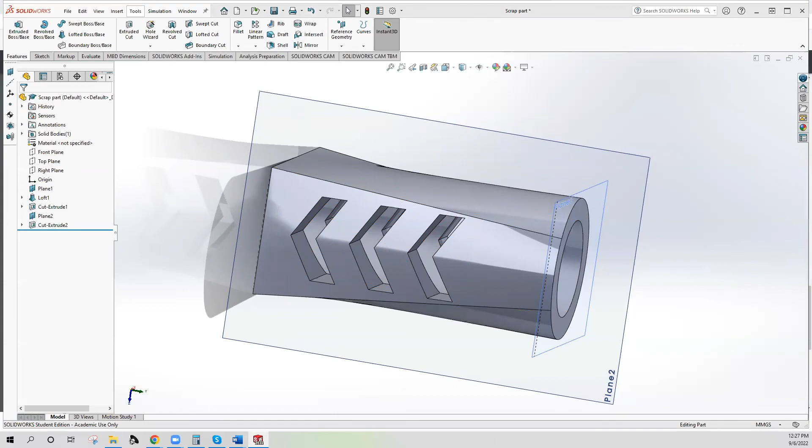All right, so I'll include this part as well. What we want to focus on, as far as the mechanics of assignment turn-in, there's a few things I want to see from you guys. One of the first big things is making sure that your part tree is expanded here, so that I can see what techniques you guys are using as you go to create things.

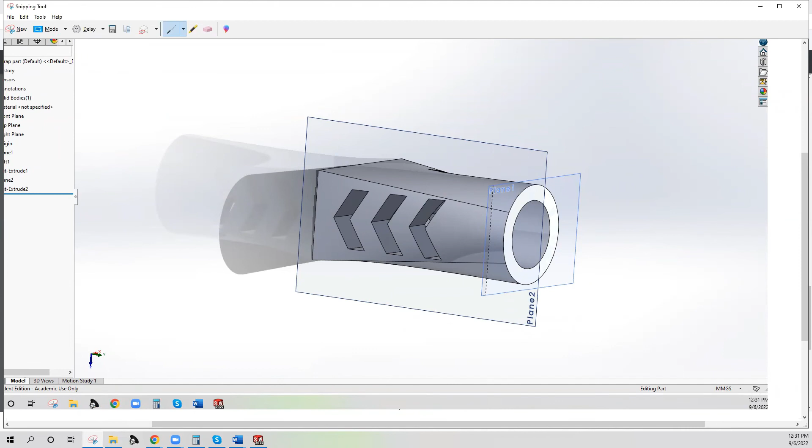But I'm going to take a screenshot like this so that I capture my full part tree, and then make sure I'm capturing, or trying to capture, what time it is. It's always interesting to see what odd hours of the morning, Sunday morning, or really more accurately Sunday night, Monday morning, students are turning stuff in.

That's private entertainment for a lot of the faculty members a lot of the times. What we want to do is be able to highlight what's been done. This way I get to see what's happening here in all of these, and you don't have to actually outline any of them. I just want to make sure you're actually using these techniques properly and understand how to apply them. Sometimes for certain things, you'll be able to select a portion of the part and bring up dimensions.

It's not always going to bring up clean dimensions for every single thing you're working on. It's probably easier in some of the other example parts we had, but you're going to be trying to get it to show some of the key dimensions if you're able to. So here, this is 100 millimeters, and you can only get there by selecting part of the parts themselves.

You're going to take some screenshots with a couple different views showing what it is that you've got, what dimensions you can get it to show.

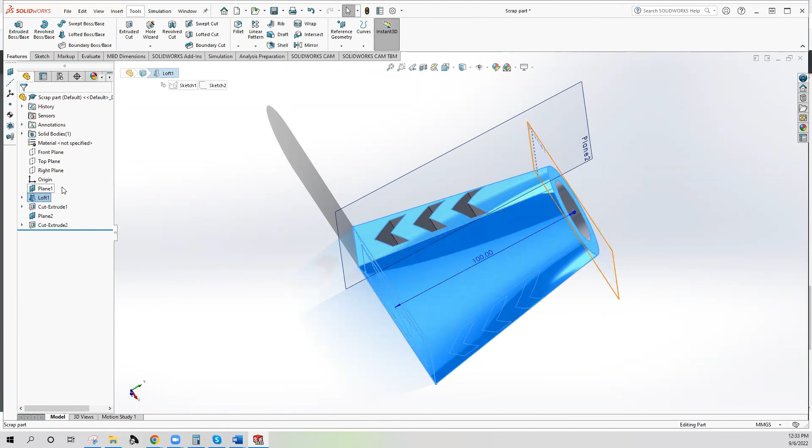So in this case, the plane, the loft operation itself, any of those will give kind of that key fundamental dimension for length. There's other notation and things you can add to them, but they don't really help for this circumstance. We're not going to get into drawings and things like that yet and how to create those from parts.

But we do want to see what these key dimensions are for some of the parts you're working on. So you'll take a snip of that and also add it into the Word doc. So you'll generate a new one.

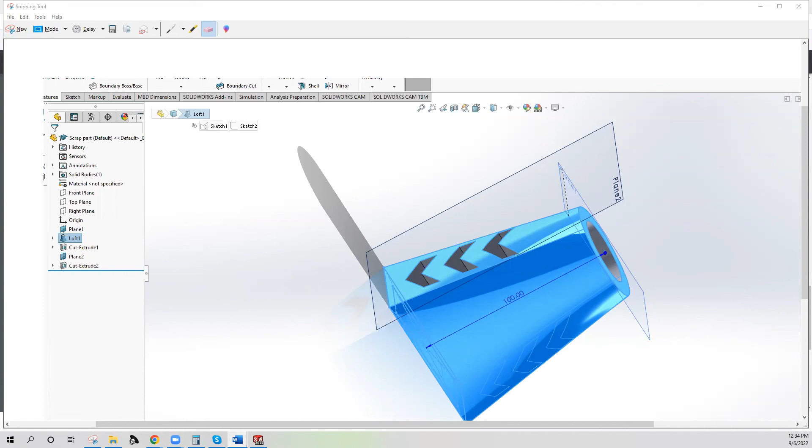Go, it's a blank Word doc, and you'll paste in a number of these screenshots showing the key dimensions.

You want to make sure to do things like add your name, class section, date. Those are all helpful bits of information to make sure that you know what assignment it is, what month it is. A couple months in, you're probably going to start losing track. That's okay, that's why we want to try and capture it where possible here.

So you'll add in all of your comments. For most of these assignments, the way that they're written, you're going to see not for sketching basics, for instance, but for something like these tutorials. Reading comprehension is a very important skill in college, as it turns out.

So making sure to pay attention to describing why this was included, and then how you would plan to use this content. Think of different applications where that might help you represent the geometry of a real object.

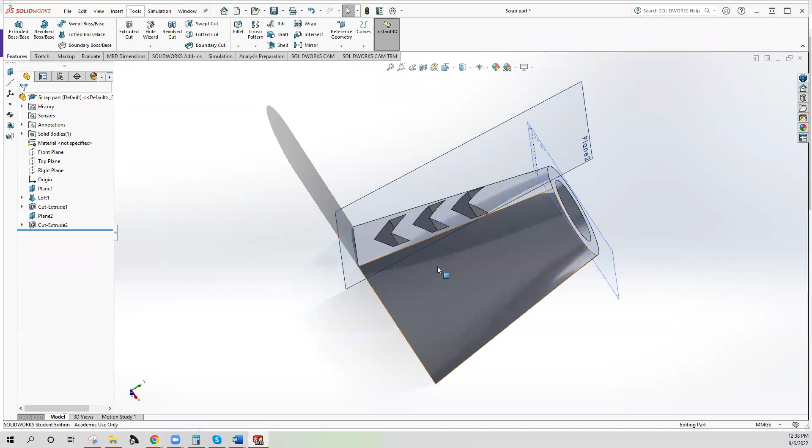So yes, the smart dimension, that's actually a good question. Once something is already in a 3D format, if we say, okay, wait a minute, maybe on this part, I can go over this plane.

So let's edit this feature. In order to change something with smart dimensions, I'm going to have to edit either a feature or an object. I'll show you one example of each.

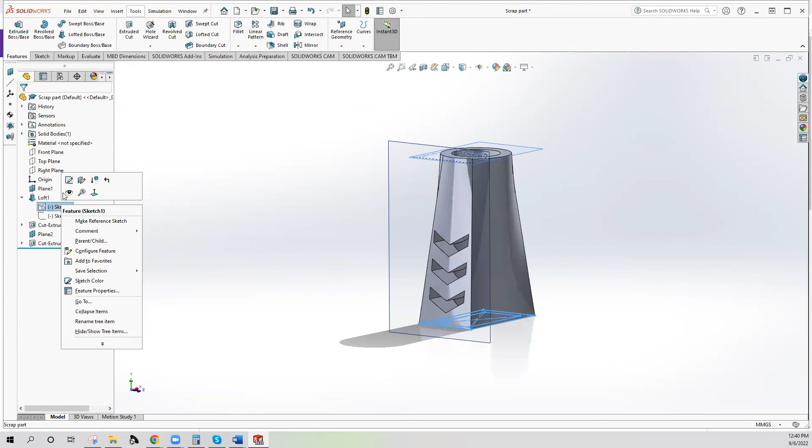You go back to either sketch 1 or sketch 2. We'll take a look at sketch 1 since that has a complex operation associated with it. Maybe this we had all wrong, and maybe we didn't need this inner circle or something like that, or maybe it was the wrong dimensions. So we'll actually set some dimensions here.

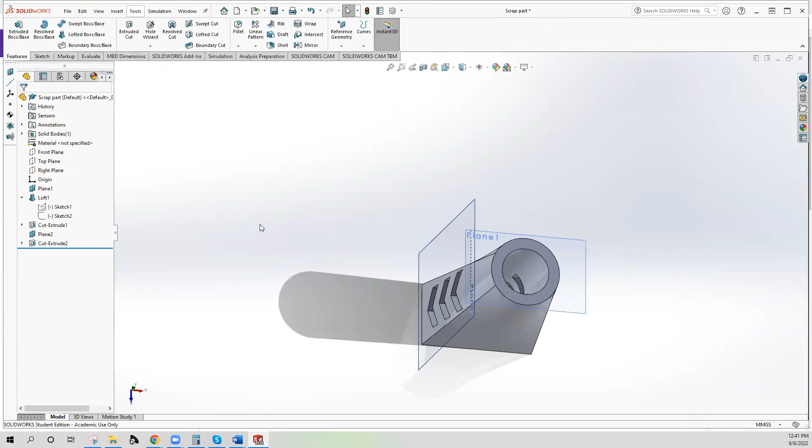So say 45, and we'll say 80. This allows us to change the dimensions of that base sketch and make corrections. Then we can hit escape to get out of that tool, and then we step out of the sketch by hitting exit. That will get us to this new version of the geometry.

Another question, submitting drawings, including all the metric. So yes, you can take screenshots with the views. You can also take a look at some of the isometric views. One of the good ones might be something like that. You still want to try and show some of the key geometry.

Now that I have dimensions associated, this would be a good example of the kind of screenshot that I'm looking for, because this will show the key dimensions for that exterior.

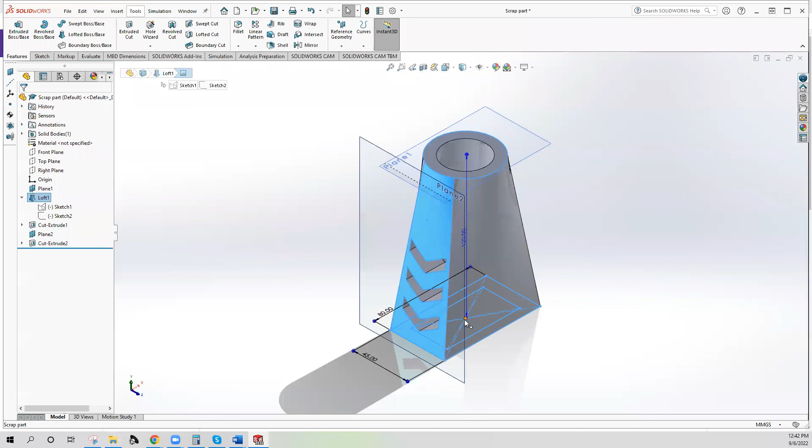So here, if we were to go back and edit this base sketch again and say this was smaller, maybe that was a feature we were planning on implementing later, let's say 55, and we'll do it off to this side, 25.

So maybe this was a feature we were planning on implementing at a later version of the part or something like that. So we're going to step out of that tool, then we're going to step out of that sketch.

And now when we go to select this, more of our dimensions show up. Some of the time, dimensions will show up. A lot of times, if you just have something like a cylindrical reference, or you don't have a lot of detail in the geometry, and it's not fully defined, you'll be missing most of those details. So this is another thing that helps us to know whether or not your sketches are fully defined, because you'll want to show usually 1 or 2 steps in the process.

So you'll want to show something like, so I'm going to cancel this and I'm going to save it real quick.

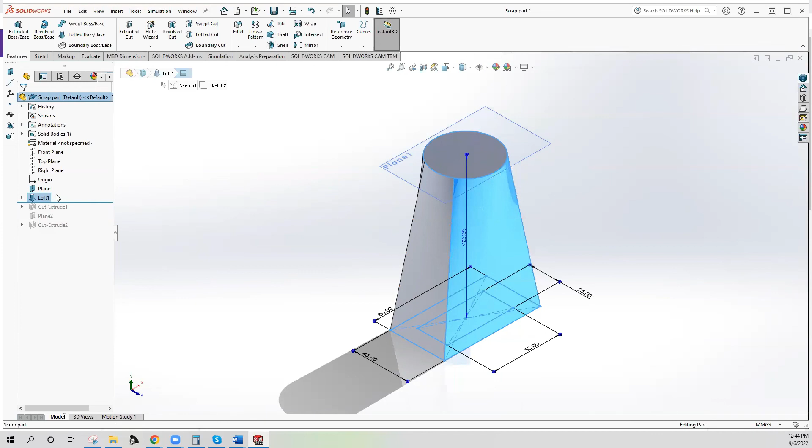If we took out that feature, took away the reference plane, took away the cut extrude, you can't go all the way back up to just one of the sketches. You can only go up to the feature level. So you would show something like this as one step. Then you might show the addition of these 2 planes, and then you might show the cut extrude as your final step.

So the objective is to be able to demonstrate what your process was to get to the end result and make it clear that you know how you got there and how you could repeat it. But using something like an isometric view makes that a whole lot easier. Whereas if you grab that feature, you can kind of see what's going on with dimensions, but you got to use your imagination pretty hard. So isometric is a good call for most things.